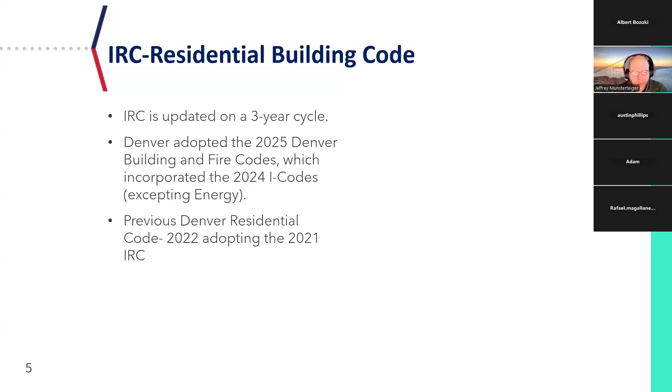NAHB members and staff, through various committees and oversight groups, are heavily involved in the development of the national model codes. We publish significant changes documents, suggested amendment documents following the publication of each code, and we also conduct cost studies for the significant changes. Our significant changes and cost studies aren't limited just to building and energy code - we also do some of the same work for the NEC, and all of that is available on our website. I'll have some links to the resources at the end of my part of the presentation.

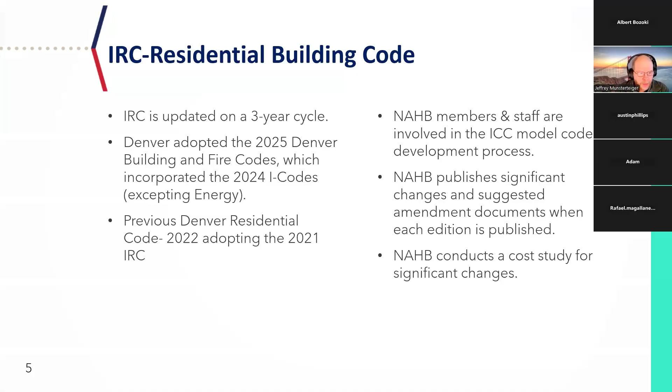A couple bigger things that might seem to have a broader impact: first, IRC Chapter 3 underwent a very significant reorganization. Pretty much every section of the IRC Chapter 3 has been moved and renumbered, so it's now organized in a bit of a more logical order. It starts with the structural provisions, the design provisions, then moves into fire resistance, fire and CO detection, fire sprinklers, and then it gets into your room layouts, means of egress, indoor environment, with on-site energy and solar and that sort of thing at the end.

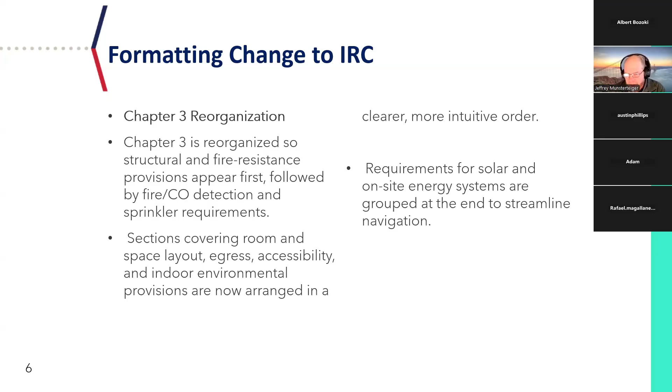Also completely reorganized were the appendices. I did not look to see, but I believe you might adopt one or two of the IRC appendices. Just know that they've been completely relaid out and renumbered.

They're now grouped into sections A, B, and C. Group A is appendices of administrative provisions. Group B is more of your planning and construction. C is mechanical, electrical, plumbing. So if you've had any things hyperlinked or documents pre-filled out with code sections, that sort of thing, you'll need to definitely redo most of those.

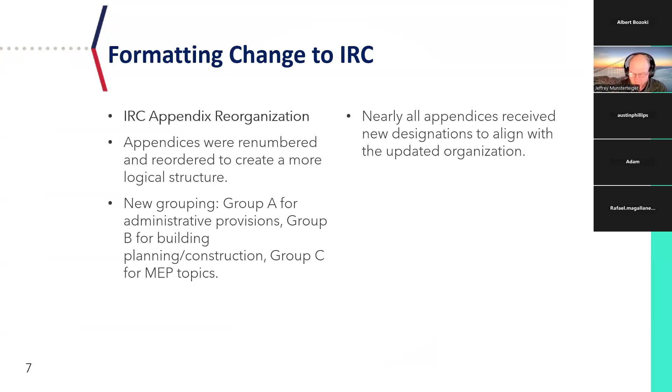Next slide, please. So when I looked at the Denver amendments, there were two things I saw that jumped out to me that I think might be impactful, and a couple ways to manage them. The first is I saw that the default ground snow load changed in table 301.2 in the design criteria from 35 to 43 PSF.

That seems like a big change. However, a couple things of note: it also provides a footnote that allows you to use the ASCE7 hazard tool to find a more site-specific ground snow load. The QR code I have at the bottom of the next couple of slides will take you to the ASCE7 hazard tool. Next slide, please.

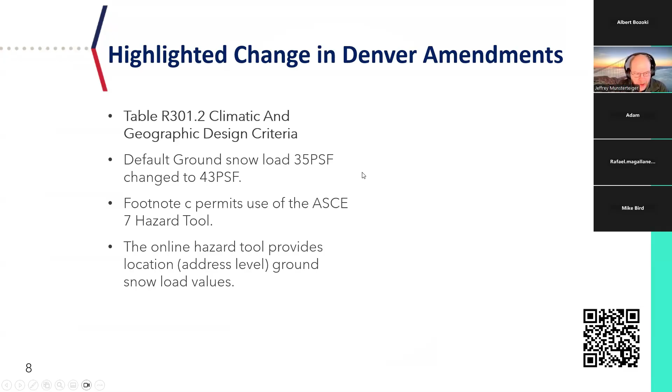So I'm going to briefly show how that tool works. You can do an address level search. If the address is not currently populated there, you can also find it with a pin on a map. You can use a latitude, longitude - a couple ways to get there.

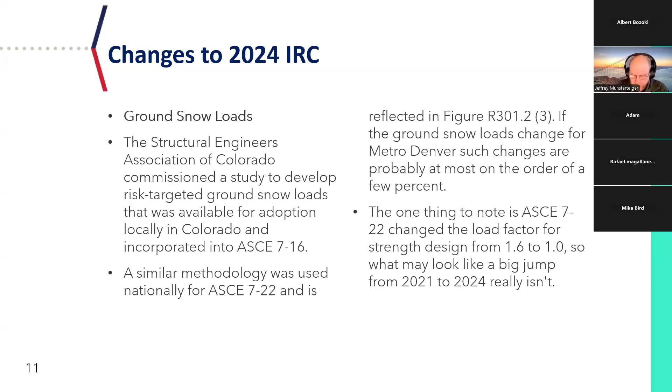Also changed is the map for the special wind regions in the IRC. The lines have been redrawn with that in the 2022 version. So the updated map is a little more accurate as far as where that boundary should be. It's important to note that the wind speeds themselves have not changed - however, the wind speed you might be required to use, depending on where you're located, could change. Wind speeds are also available in the hazard tool, so that would be a way you can obtain those without using the map.

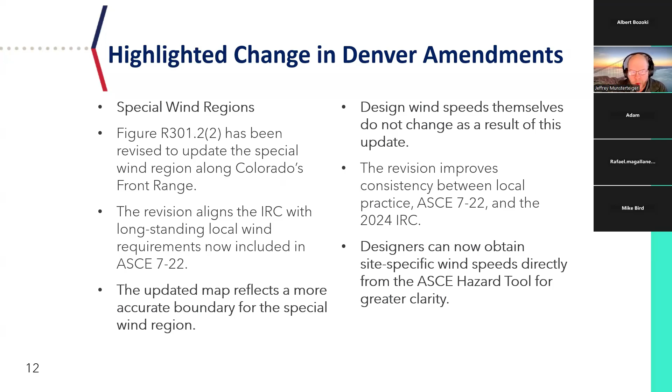Couple changes in chapter 3 regarding landings for stairways. Garage interior landings at doors can now be up to 7 3/4 inches below the door's threshold, similar to what's been permitted at the required egress door. A top landing is not required for a stairway when that stairway is at an exterior door. And where you have a stairway with 3 or fewer risers that's not serving the required egress door, you only need a 36-inch wide landing at the bottom, regardless of the width of the stairway.

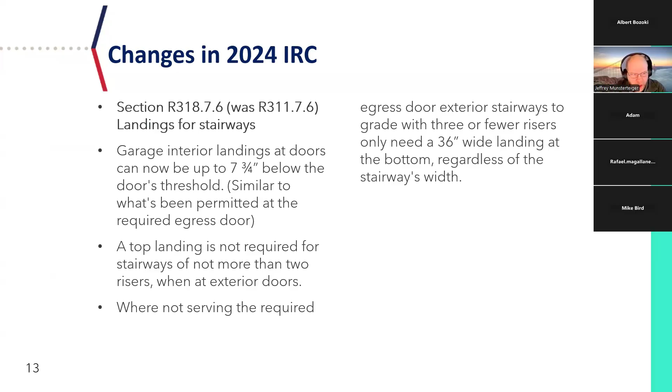If you're involved in remodeling existing buildings, there's a new section added: if you're reworking a stairway, you're no longer required to comply with the requirements for new stairways in a situation where the existing space or construction doesn't allow for the reduction in stairway pitch or slope. That's only applicable in a remodeling situation when you wouldn't have the space to otherwise comply.

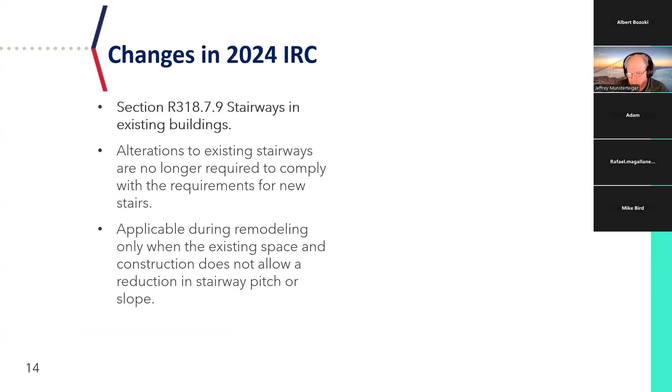A couple other changes: there are now some technical prescriptive provisions requiring splices in horizontal framing members to occur over their supporting member. That's not something you see often, but if you aren't able to comply with that, you would need to have those connections designed by a registered design professional. That is a requirement in the code now.

Floor framing supporting guards: when you're building an opening in a floor at a stairway or a balcony overlook, like you might see in a loft, and the floor framing is used to support the rotational forces of the guard at that edge, there are now prescriptive options in the code that apply to how you build that. Those prescriptive requirements are limited to conventional dimensional lumber framing, so if you're using floor trusses and I-joists, those specific design requirements have to be accounted for in the design - it's an item to address when working with your truss provider.

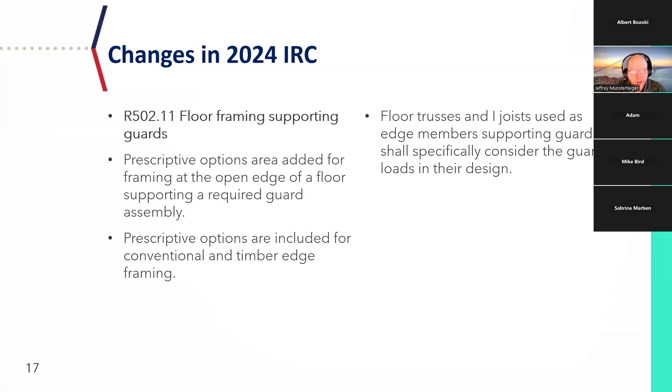A change that rolled back from the 2021 code: the requirement to put a 10 mil vapor retarder complying with ASTM Class A requirements has been rolled back to the previous language, so you can go back to using a 6 mil construction grade polyethylene underneath your floor slabs.

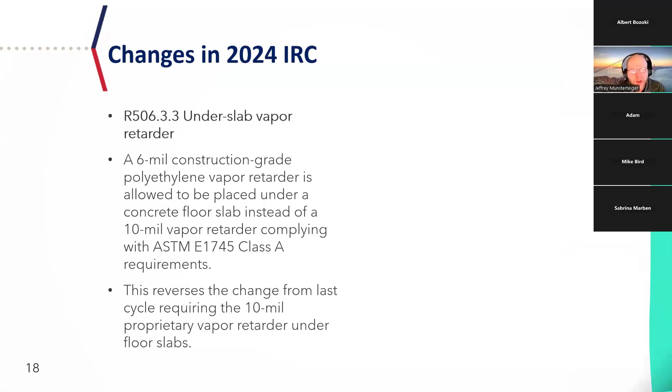Jumping to building exterior requirements, there are now some prescriptive requirements for deck ledgers added in Section 507. One thing to note is the water resistive barrier now needs to be continuous behind your deck ledger and needs to lap over the vertical leg of the ledger flashing. There's an exception if you space the ledger off the building - that's a prescriptive method in the IRC. But just know you now need to make sure you have a weather resistant barrier behind your deck ledgers.

In Section 602, wall heights for wood framing, there's a change in definitions. The term story height was changed to wall height, and there were a few errors in the adjustment factors. If you're familiar with the older language, this reverts back to a more traditional way of looking at it, so that the methods are tied to the height of the wall, not so much the height of the story itself.

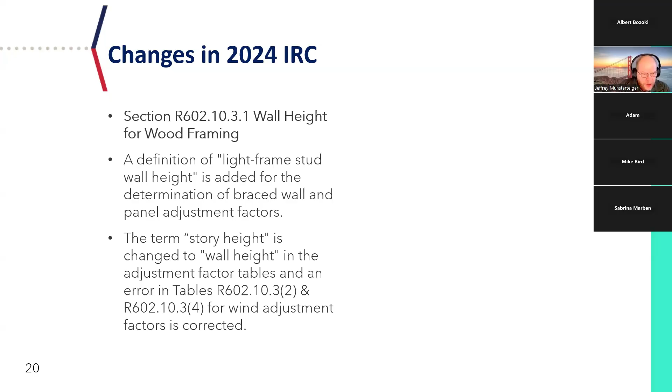And then one change in the mechanical section: M1411 now has some specific allowances for the use of the new A2L refrigerants. Those are, my understanding, becoming more commonplace, so the code is accommodating that.

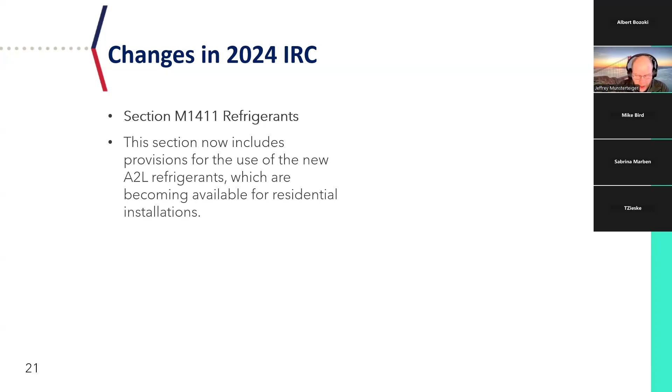Thank you, Jeff. I'm Nathan Kahre, a senior program manager at NAHB. I focus on energy codes. I think I saw some familiar names. I actually previously worked for Thrive Home Builders and Energy Logic here in Colorado, so I've seen firsthand what building on the Front Range looks like, and I'm here to talk about some of the energy code changes that you're going to be facing.

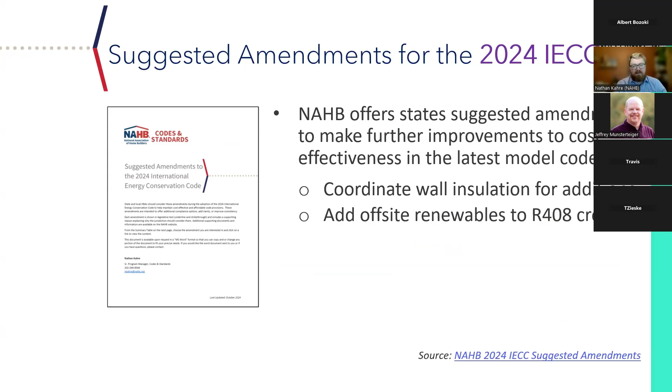So I want to give some information about those appendices and things to be aware of before considering their adoption. And again, this is what that suggested amendment document looks like. Some of the key things: we're making both administrative changes as well as a few technical changes, such as allowing for offsite renewable energy, allowing for some coordination between new construction and additions. Not as important for Colorado, but adding a slab edge insulation exception for when you're in a high termite area, and a few other items going on from there.

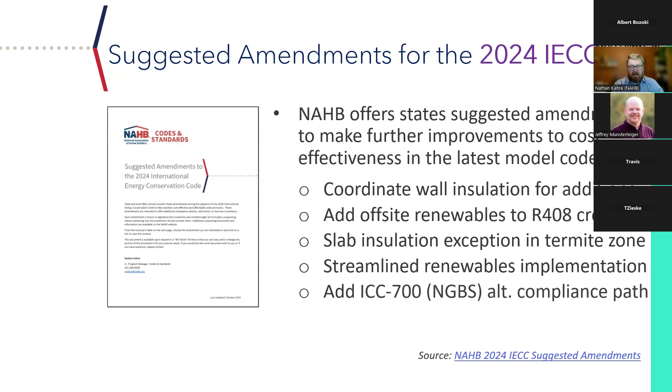So some of the key information about the 2024 IECC: it is expected to be anywhere from 7 to 8% more efficient than the 2021, with the 2021 being, I believe, between 8 and 9% more efficient than the 2018. So we've seen some large jumps in these last few code cycles.

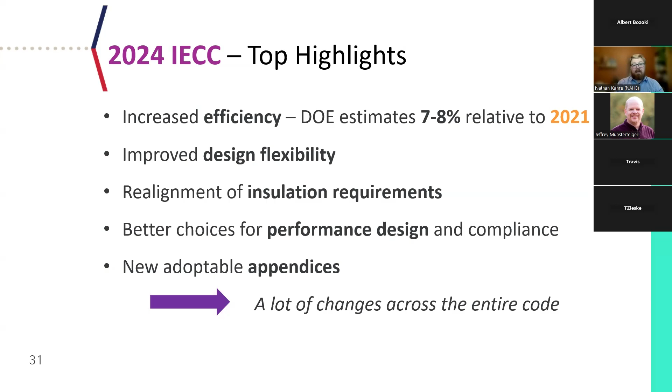Key things about the 2024 that we like over the 2021: there's some improved design flexibility, realignment of some of the insulation requirements, and some better choices for performance, design, and compliance. One of the key things I like to talk about with the 2024 is that while it is more efficient, it allows for a lot more flexibility, so you might end up seeing cost savings in the 2024 compared to the base 2021 IECC.

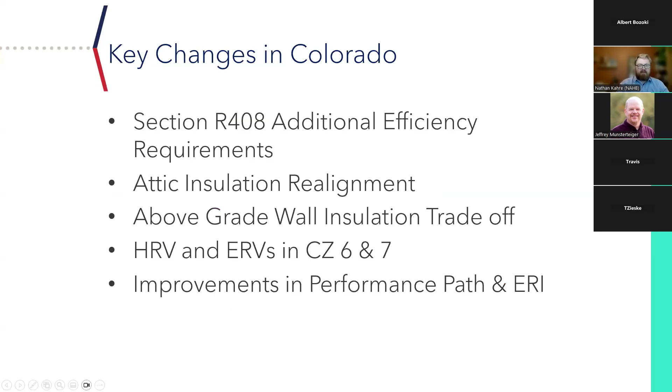So there are a lot of changes in this code. I'm not going to go through all of them, we'd be here for about 2 hours, but I just want to talk about some of the key ones that are going to impact Colorado. So let's go to this next slide.

The first one is R408. This is the big change. In 2021 this was introduced, and it's been expanded and changed dramatically in 2024. So basically, if you're following the prescriptive path, what's set up is you follow the prescriptive requirements, and then you do this R408.

It's additional efficiency features, so you're given a list of 51 potential measures you could pick from. For each measure, you can get a specific number of credits per climate zone. Each home must achieve a minimum of 10 credits and implement at least 2 measures. This is an area where there are amendments in the model low energy carbon code in Colorado, where that credit number is being adjusted based on your conditioned floor area.

So let's go to the next slide. Going back to previous codes, credits didn't exist in 2018. The 2021 started to introduce this, but it just gave you a list of 5 options, not a lot to choose from. Some of those requirements left you with conflicting requirements that maybe didn't work as well, such as more efficient HVAC equipment - a 95 AFUE furnace is going to bring significant savings in Colorado, but a 16 SEER AC, not as much. So the next iteration of R408 really gives a lot more flexibility and allows you to make choices that best serve the customer.

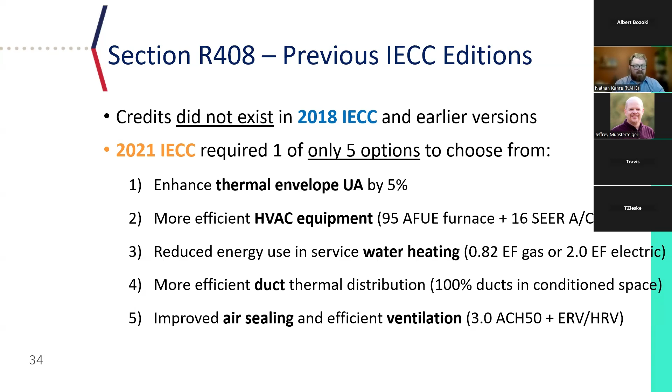Next slide - how does this work, what does it look like? This is just an example of what you'll see in this table. You have a list of measures going down the left side, and then credits based on your climate zone. Just a quick reminder, most of the Front Range is in climate zone 5, and as you get into the mountains, you'll see climate zone 6 and 7.

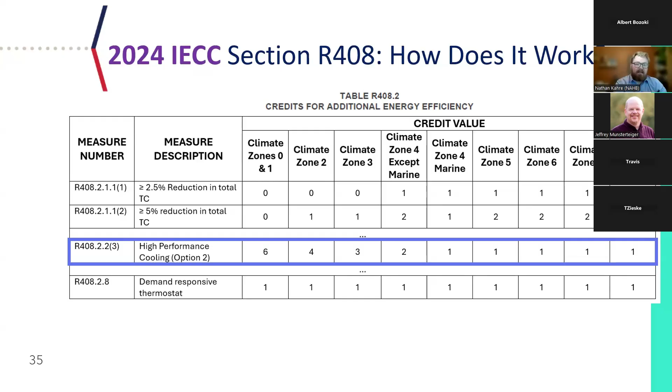So this is just one example, high performance cooling option 2. That doesn't tell you very much about what that credit is, so you have to go down into the text below. You'll see there's more information about each of these measures and what that means. High performance cooling option 2 means a 16 SEER air conditioner, which you would only get 1 credit for in Colorado.

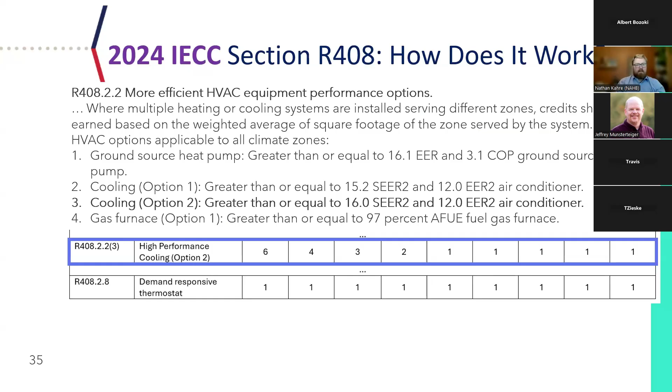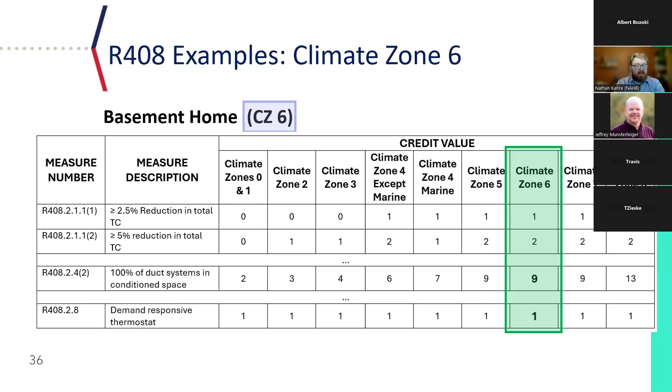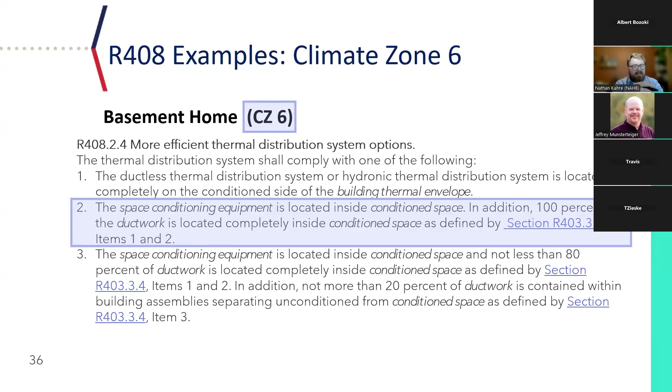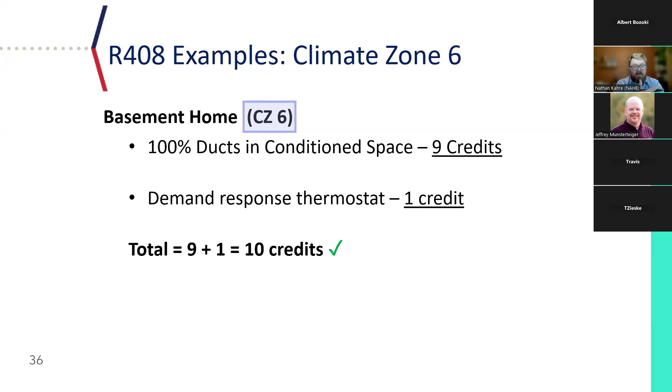This is telling more of the details about what it takes to get those credits. You'll see 9 credits for ducts, 1 credit for the thermostat, 10 credits overall. There are a lot of different options and pathways in R408. This is going to be an area where you'll have to spend some time looking and identifying what's going to work best for you, your build process, and what's going to work best for your customer.

So moving on to the next change is ceiling insulation. What we saw in 2018 IECC is that in climate zones 4 through 7, the ceiling insulation was R49 - that's been typical, been in the code for a while. In the 2021 IECC, this jumped up to R60, and unless your local jurisdiction amended it out, that was R60.

One of the key changes in 2024 was a realignment of this, a recognition of what's needed to be cost effective for the majority of homes in those climate zones, so it went back down to R49. This is a key change and a win that reduced the cost of construction, so we are happy to see it, and I'm going to keep fighting for more changes like this.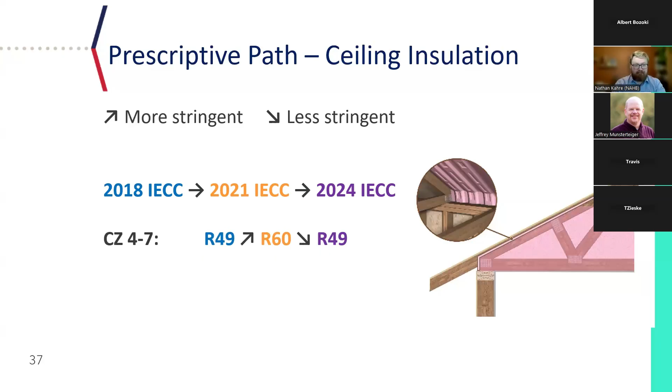One of the other changes is wall insulation requirements. In 2021, there was a bump in climate zones 4 and 5 to R20 plus 5. Adding that inch of continuous insulation can be a challenge and a key issue to accomplish.

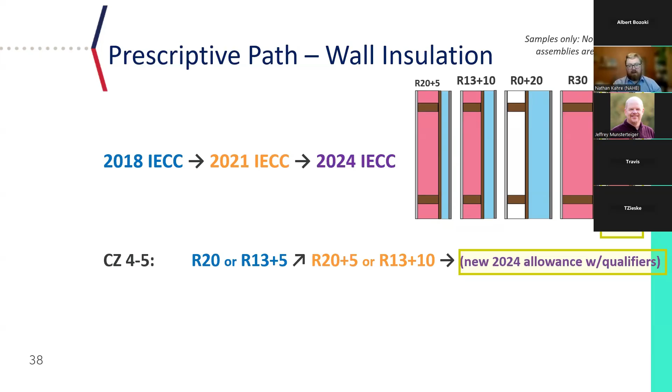So one of the things allowed in 2024 is an alternate pathway under the prescriptive path to get back to an R20 wall assembly. If you'll go to the next slide, the base code requirements, a little jumbled, are R20 plus 5, 13 plus 10, 20 continuous, or an R30 cavity.

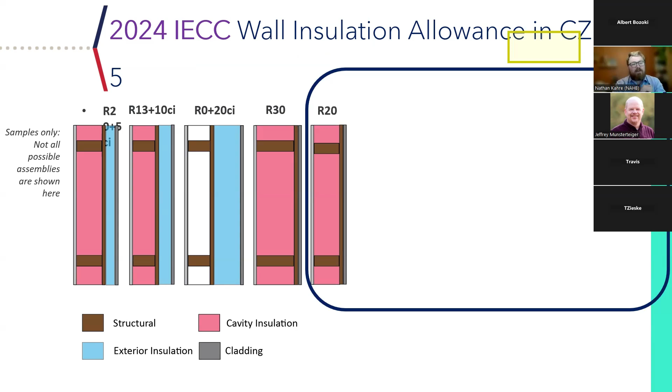You can install R20 if you do one of the following. You can get 3 credits from R408, going from 10 to 13 credits. That allows you to offset that energy savings on the wall with things like more efficient equipment, more efficient appliances, lighting, etc. You can also install a heat pump space heater or heat pump water heater, which allows a direct trade-off.

Or you can install renewable energy, solar, on top of there. That's something like a watt per square foot of conditioned space, so it ends up being a pretty reasonable amount of solar to make that trade-off as well.

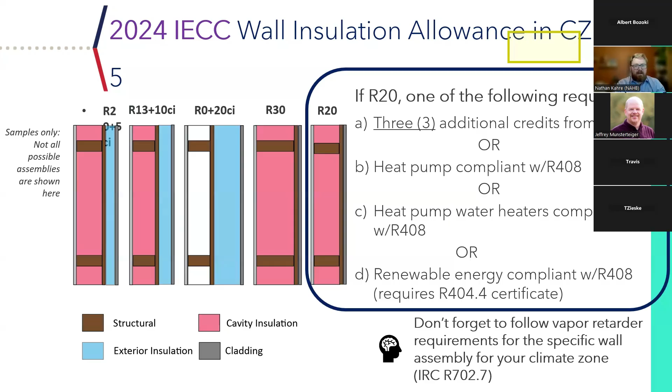All right, going on to the next slide. The last thing - while there are many, don't want to talk about all of them - is that the requirements for heat and energy recovery ventilators have been shifting farther and farther down. In the 2018 IECC, there was no requirement in any climate zone. In 2021, there was a requirement to install these for ventilation in climate zones 7 and 8.

And then in 2024, this was added to climate zone 6, so you'll see that more and more in the mountain regions in Colorado. It's also included as an option in R408, where you can install an ERV or do some more enhanced air sealing to get some credits there. So it is an option, but not a mandatory requirement.

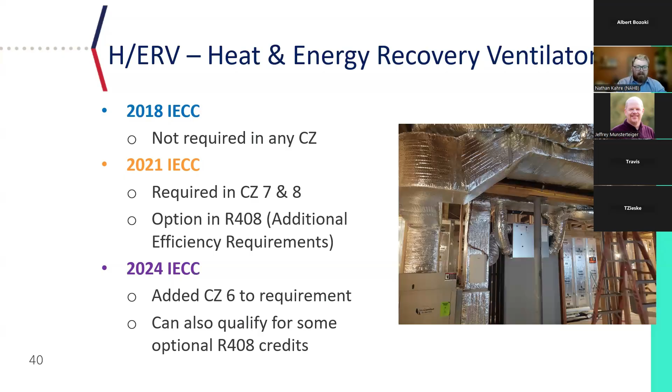Keep moving on. Last, the performance path has been updated. One of the key things is an expansion in trade-offs. What was previously not allowed under the performance path was making trade-offs based on heating and cooling equipment, water heating equipment, or duct location. This is all going to be allowed now.

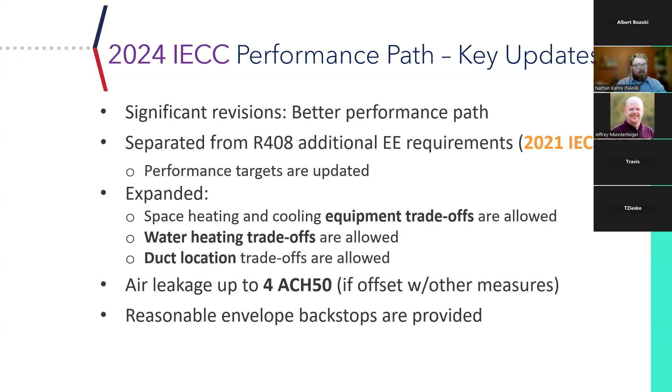So you're going to have some more flexibility under this path if you're working with a rater trying to do this modeling work. This is going to give you some more flexibility when you're comparing the whole energy consumption from the house. Next slide.

And then also the ERI path has been updated. There was a 5% penalty under the 2021 that just didn't really make sense. And then also the opportunity to use solar in the ERI has been added.

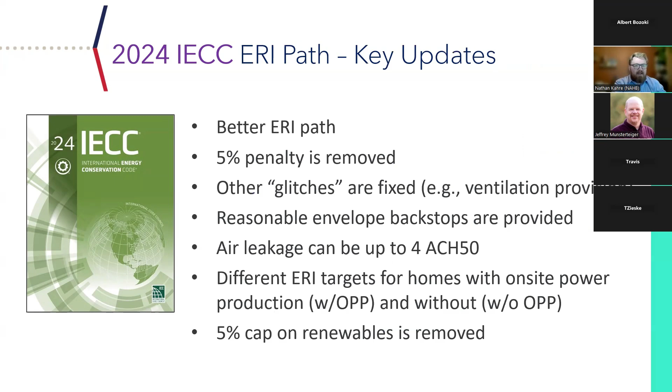So want to briefly talk about the Colorado MLECC. It is based off the 2024 IECC, so you would look at complying with the 2024 and then some of the new requirements under the MLECC. The two main ones I'll talk about are key requirements for electric ready features, especially in mixed fuel homes, and then thresholds based on home size - this will become more clear once we're talking about it from a cost perspective.

So the key requirements for electric ready would include PV ready, which is a requirement for all homes, electric vehicle ready, which is a requirement for all homes. And then under the other electric ready requirements, you would see an electric ready requirement if you installed a natural gas stove, a natural gas dryer, a natural gas water heater, or a natural gas furnace. All of those, the code includes requirements to pre-wire for a future electric piece of equipment as the state pushes for all electric homes.

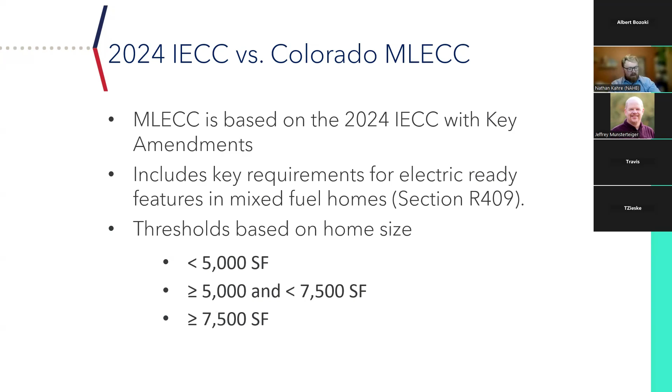Let's go on to the next one. I'm going to walk through some cost estimates. Again, this is based on research from Home Innovation Research Labs and their 2024 IECC cost impact report. It's going to be broken down by climate zone.

I have this map of Colorado. You'll see the majority of the front range is in climate zone 5, and as you peak up into the mountains, the lower parts are in climate zone 6, then higher peaks are in climate zone 7, shown in purple. There's also a small part in the southeast of the state that is climate zone 4. But let's focus on climate zone 5, since that's where the majority of the people and construction is going on.

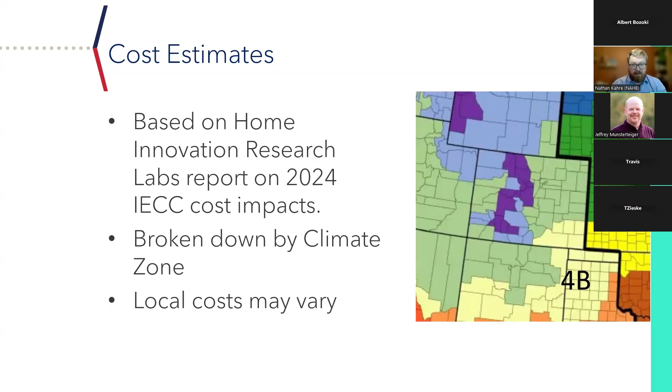So the first comparison I'm making is what it's going to cost to go from the 2018 IECC to this new Model Low Energy and Carbon Code. We're looking at two types of homes, one using all electric equipment and another using mixed fuel equipment, like a gas water heater and gas furnace. You'll see that in climate zone 5, this ends up costing anywhere from $8,500 to about $7,000 a home. This is a significant impact.

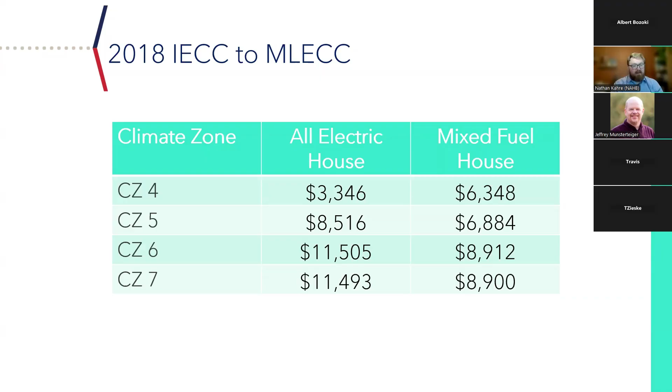Looking at information from the Colorado Energy Office, there are still plenty of municipalities and especially counties in the Front Range that are still on the 2018 code. So jumping to this MLECC is going to be a large jump and have a significant impact.

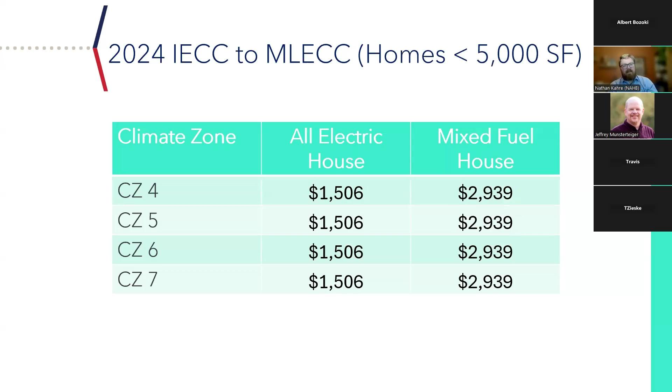The next thing I wanted to look at is the cost impact to go from the 2024 to the MLECC. This is for small homes under that 5,000 square foot threshold, and you're seeing around $1,500 to $3,000 on the mixed fuel homes. That is significantly more. These are not climate zone specific requirements, they're just base requirements across every home, so they're consistent across all climate zones. But you're seeing the cost of those electric-ready requirements making a big impact.

So that's it for me. I'll say just as a precursor, a lot of these costs are based on national estimates, so your local costs are likely to vary. But if you'd like more information about where these costs are coming from, or what key changes we're looking at, please feel free to reach out. I'm happy to give you the information we used to develop this. Thank you.

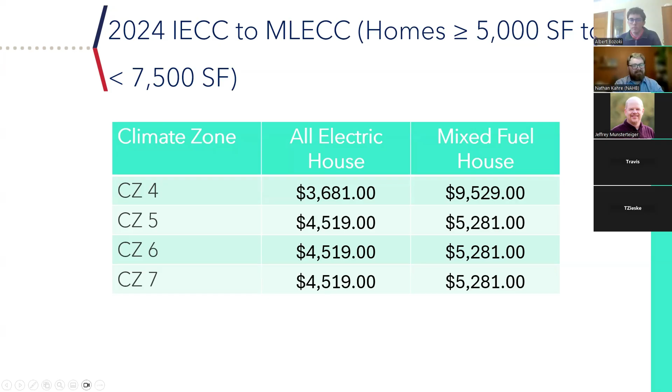For those that don't know me, my name is Albert Bozoki. I'm the Government Affairs Coordinator here at the HBA of Metro Denver.

To kick things off, I want to set the stage for the broader code landscape we're heading into. This portion of the webinar will focus on what municipalities across the Denver metro area are doing with respect to the 2024 I codes, as well as fire sprinkler requirements and state code adoption dates to be mindful of. I'll walk you through who has already adopted, who is planning to adopt, and who has indicated they're not moving forward at this time.

All of the information I'm covering here is current as of yesterday, January 20th, 2026, and it reflects what municipalities have shared with myself and with the HBA.

Before we get into the local code adoptions, I want to flag some important timing considerations related to state code adoption requirements. When it comes to the Colorado Low Energy and Carbon Code, cities and counties must adopt this code, or a more stringent version, when adopting or updating any building code after July 1st of this year. Essentially, if a city or county adopts any code whatsoever after July 1st, they are also required to adopt this state energy code.

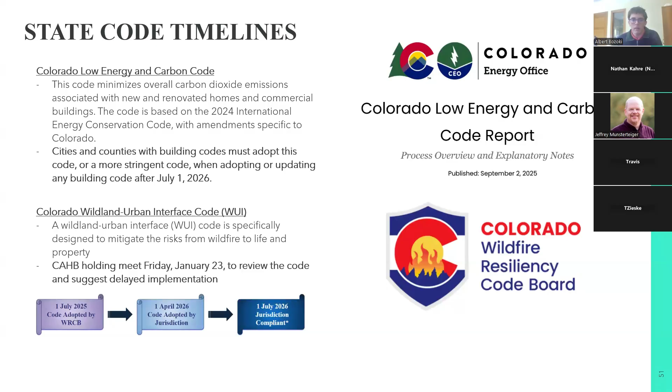Okay, let's move on. So who is and who isn't moving to the 2024 I codes? One of the biggest takeaways up front is that there is no single uniform adoption timeline across our region. Each jurisdiction is approaching the 2024 I codes differently, with different schedules, scopes, and amendments. From an industry perspective, this means it's especially important to understand these requirements on a jurisdiction-by-jurisdiction basis, because assumptions you make in one municipality may not apply to their neighbor just down the road.